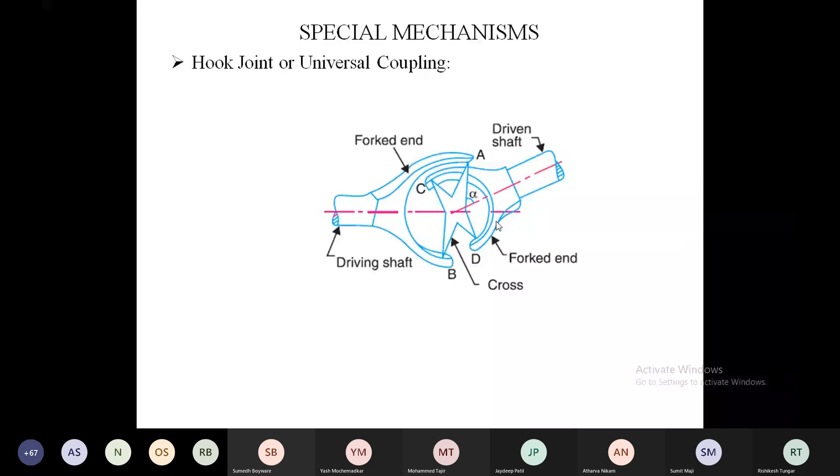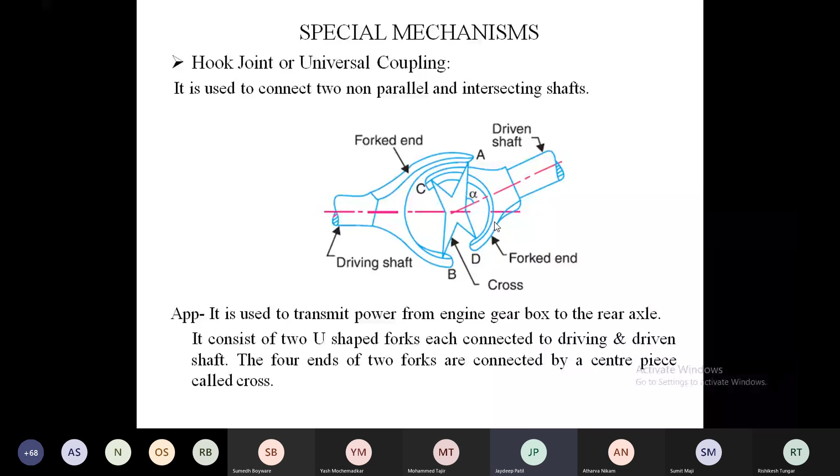Now, one application of this Hooke's joint is to transmit the motion from the engine gearbox to the rear axle. Okay. Now we will see the analysis of this Hooke's joint. There are various terms. First of all, we will see how to find out the velocity ratio of the Hooke's joint. This is a very important point because in the university question paper there is a question: derive an equation of velocity ratio of Hooke's joint. This question is asked for 6 marks.

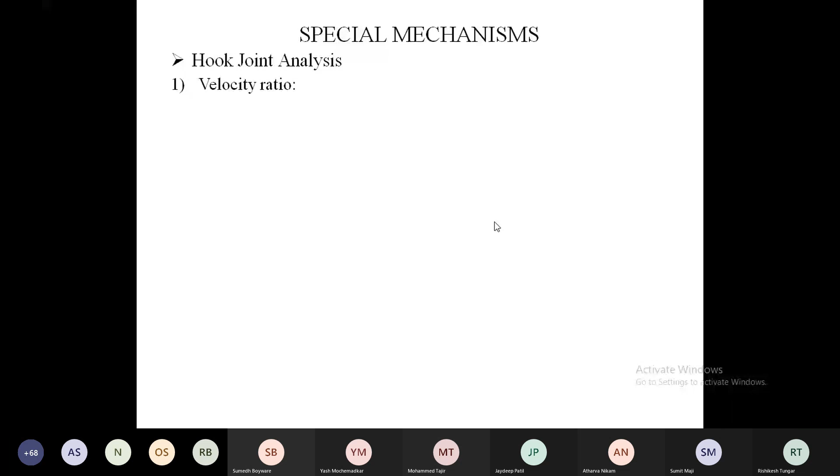We will see the first point, Hooke's joint analysis. In that there is velocity ratio. Velocity ratio is the ratio of the speed of the driven shaft to the driving shaft in terms of RPM or radian per second: omega 2 upon omega 1 or n2 upon n1. Okay, now first of all see if you understand this figure. Suppose there are two shafts. This is very important because you are going to derive the equation of velocity ratio by considering this figure.

In this there are two shafts. One is the driving shaft. See here, this is the driving shaft. Okay. One more shaft is there, the driven shaft. Now the driving shaft is integral with the fork AB. See, this is the fork AB.

Now this is the driving shaft, and the driven shaft. Both shafts are inclined at an angle alpha. Here this is the fork AB. Fork AB is integral with the driving shaft and fork CD is integral with the driven shaft. And the angle of inclination between the two shafts is alpha.

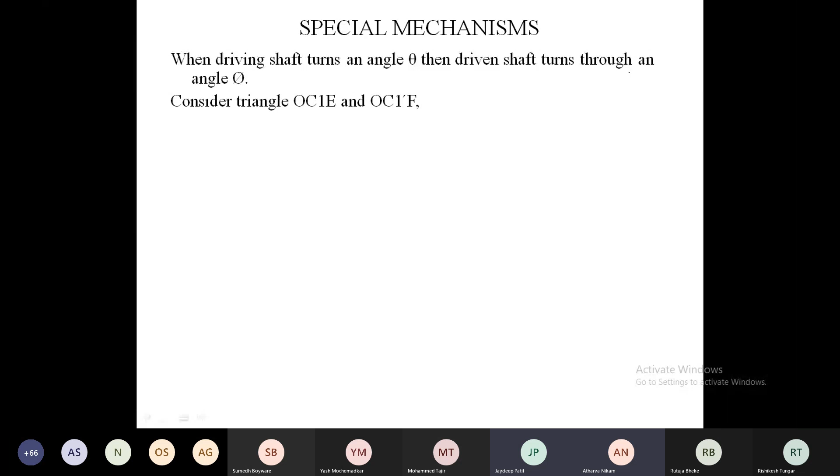And what is your equation 2? Equation 2 is your OF upon OE. Is it right? Means what will come there? 1 upon cos alpha. Here you will get 1 upon cos alpha. Correct? Yes. Okay, means equation 2 becomes tan phi upon tan theta is equal to 1 upon cos alpha. Or do the cross multiplication here, you will get tan theta is equal to cos alpha into tan phi. Equation number 3. Got it?

Yes, sir. Understood? How to get equation number 3? Okay. Now differentiate this equation number 3 and tell me the next step. Differentiate equation 3 with respect to t. What will we get here? What is the differentiation of tan theta? Sec square. Correct. Sec square theta into d theta upon dt is equal to what for cos?

And it is a multiplication. Cos alpha into sec square phi d phi upon dt. Here, sec square theta d theta upon dt, cos alpha. Alpha is a constant angle because the angle of inclination between the two shafts is constant. You will get here cos alpha sec square phi d phi upon dt. Now what is meant by d theta upon dt and d phi upon dt? What is this? Which velocity, linear or angular?

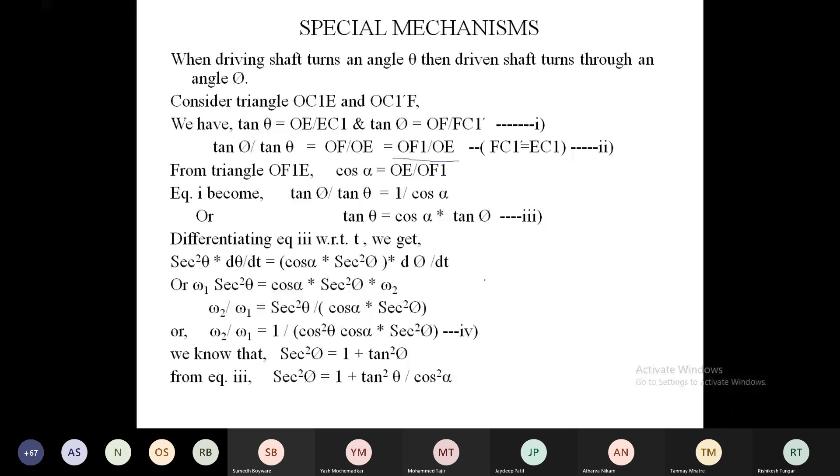Now, tan theta is equal to what? Sin by cos. Correct. Means you will get sec square phi is equal to 1 plus sin square theta upon cos square theta, into 1 upon cos square alpha, instead of tan square theta. Means in the denominator you will get two terms: sin square theta divided by cos square theta into cos square alpha. Is it right?

See the right hand side: 1 plus sin square theta divided by cos square theta into cos square alpha. Yes or no? Yes, sir. Okay, now do the cross multiplication. What will come? Cos square theta into cos square alpha plus sin square theta, divided by cos square theta into cos square alpha. Means you will get this equation by cross multiplication at the right hand side. Got it?

Yes. Okay. Now alpha is a constant. Now you have to put it into the numerator. Instead of cos square alpha, you have to write down the equation in terms of sin square alpha. What will come? Cos square theta. See only the right hand side. Cos square theta into bracket 1 minus sin square alpha, plus sin square theta. Is it right?

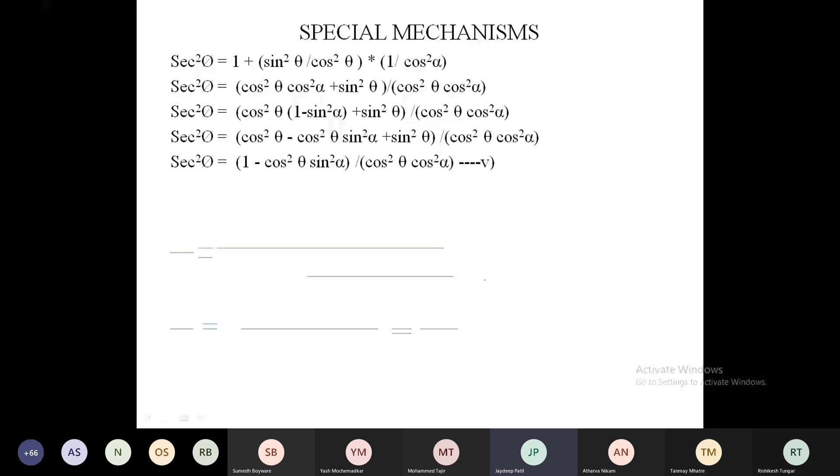So here you get the modified equation of sec square phi: 1 minus cos square theta sin square alpha divided by cos square theta cos square alpha. This is equation number 5. But we know equation number 4. What was equation number 4? Omega 2 upon omega 1 is equal to 1 upon cos square theta cos alpha, sec square phi. This is equation number 4.

Now instead of sec square phi, you have to put equation number 5 and you will get this equation. Omega 2 upon omega 1 is equal to 1 upon cos square theta cos alpha into sec square phi, which is equation 5: 1 minus cos square theta sin square alpha upon cos square theta cos square alpha. In the denominator, cos square theta and cos alpha get cancelled. Is it right? It cancels here. Yes, sir. One.

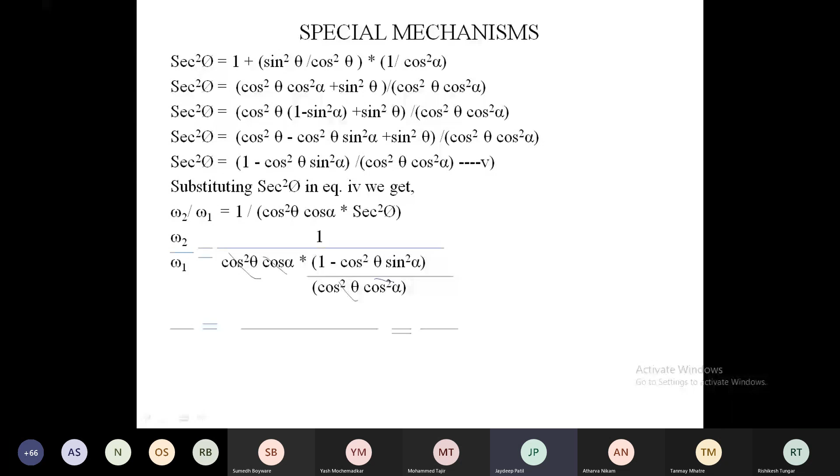Here there is only one cos alpha. Now you have to take this cos alpha to the numerator. You will get omega 2 upon omega 1 is equal to cos alpha upon 1 minus cos square theta sin square alpha, which is equal to n2 upon n1. This is the speed ratio or velocity ratio of the Hooke's joint, to find out the speed of the driven or driving shaft.

Now what is this alpha? Alpha is the angle of inclination of the driving and driven shaft. Theta is the angle turned by the driving shaft. If you know the speed of the driving shaft, the angle of inclination of the driving and driven shaft, and how much angle is turned by the driving shaft, you can easily find out the speed of the driven shaft, omega 2 in radian per second or n2 in rpm. Do all of you understand?

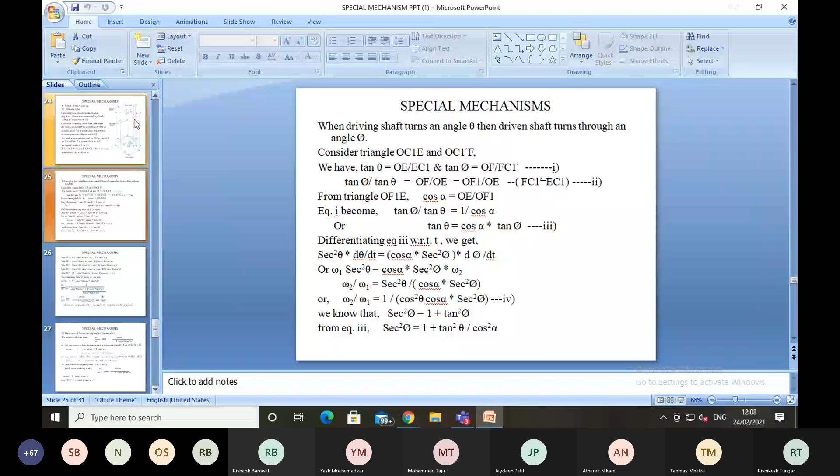First of all, draw this figure. Don't write this description. For velocity ratio, you have to draw this figure. Only go through it. Draw freehand. Do you understand this figure? Yes. Wait.

Okay, now how is the session of Sheetal Patel ma'am and Radkar sir? Good, sir. Nice, sir. All of you think about this. Good. Okay? Most of the students are not joining these soft skill lectures and are not doing the assignments. Okay.

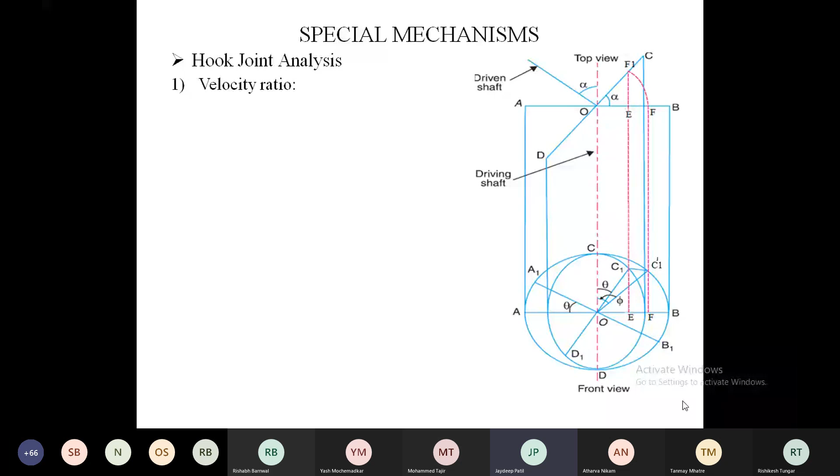Okay, is the figure done? Is the drawing done? Yes sir, the drawing is done. Okay. You have to start. Don't write this description. You have to start directly from this: when the driving shaft turns through an angle theta, the driven shaft turns through an angle phi.